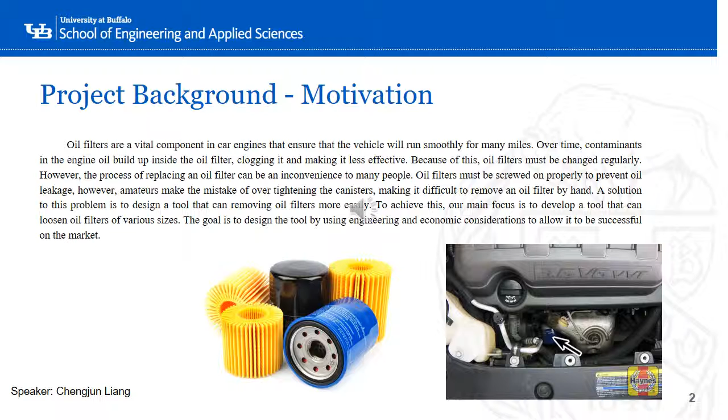In order to solve all these problems, our group decided to design a tool that could remove the oil filter easily and effectively. This tool will work on oil filters of various sizes in various angles.

In order to design our oil filter wrench, we must first create a framework to determine all the functions of our tool. These functions will ensure that our oil filter wrench operates as desired. First, the tool must be able to fit around the housing of a typical oil filter that is commonly used in modern cars. The wrench must be able to hold and grip the surface of the oil filter canisters, even if they are oily. In the process of gripping the oil filter, it would be beneficial if it did not cause significant damage to the housing, as this can cause oil to leak out.

To make the tool more versatile, the user must be able to apply torque at any angle relative to the gripped location. This will allow the user to approach the oil filter at any angle. Finally, the tool must be comfortable for the user to operate. To do this, it must be both ergonomically comfortable to hold in the hand while also being lightweight so it does not cause strain on the arm.

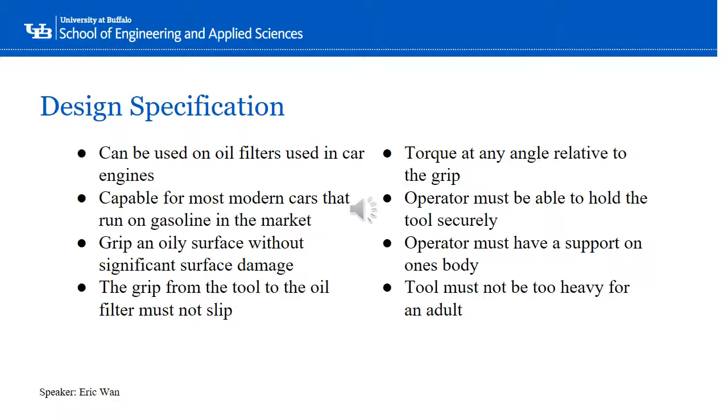Throughout the duration of the project, we had to create written reports that showed the progress that was being made on our project. The first step was to create a Gantt chart. The Gantt chart is a tabulated schedule that shows the due dates for each assignment and gives information on how much time we have to do each of them. Next, the project specification. This report provides a framework for the design of our wrench, the parameters under which it must follow, and the goals it must achieve.

The prototype concept details the physical design of our wrench and the method that will be used to test it and determine if it works. The prototype drawing is a CAD drawing of our prototype that informs the exact dimensions of our product. For the materials and components list, we decided that we will fabricate the handles and jaw from scratch while purchasing all the bolts and nuts since they are standard parts.

The design review is a recap of all the previous assignments. Finally, the economic and environmental report details the cost of mass producing our tool and the environmental impacts it will have from its fabrication, use, and disposal. The final report compiles and summarizes all of the previous reports that were handed in.

To inform us of our design choices, we gathered information from a variety of sources. First, we found 2 textbooks that were useful for learning about the physical properties of our tool. These texts were Shigley's Mechanical Engineering Design and Materials Science and Engineering, an Introduction. From these textbooks, we found information regarding yield strength and ultimate tensile strength. The American Society for Testing and Materials provides accurate data on these values for a variety of materials.

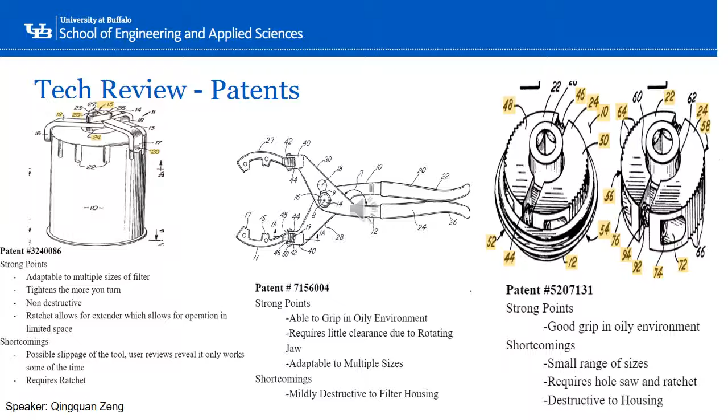The one at the right can also provide good gripping powers in oily surface. However, it's limited to a small range of sizes and it requires a ratchet to operate. Lastly, it can also damage the oil filter housing. We gather the advantages of these patents to insert them into our design, and we try to avoid these shortcomings.

We created 2 surveys on automotive forums on Reddit. One is about methods used to remove the oil filter and the satisfaction with the tool, and the other survey is about the difficulties throughout the process. 250 people take these surveys, and 200 of them are mechanics or automotive professionals.

We did a functional decomposition, and 2 sub-functions and 2 auxiliary functions were identified for the overall function of removing an oil filter. Different combinations from each form of each function can be evaluated to create the morphological designs. With so many possible combinations, we used engineering judgment while keeping customer needs in mind, like ergonomics and economics, to eliminate undesirable combinations.

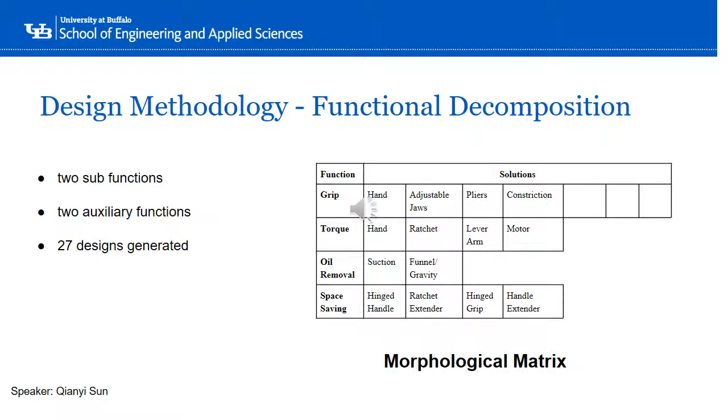The designs generated using the morphological matrix and brainstorming are filtered to find the overall best designs in concept selection. 27 designs were generated, and 10 best design concepts were then passed along to the objective selection method. To screen the choices, the best 10 designs were screened to 5 by going through a screening matrix, which quantitatively screens the design based on a number of characteristics relative to a reference design.

And the last 5 designs are selected by continuing on to be scored against the same characteristics but out of a maximum score, with each characteristic being weighted out of 100%. The concept selection process is shown in the slide, and the selected design is M7 hinged filter wrench. Then the chosen design can be modeled.

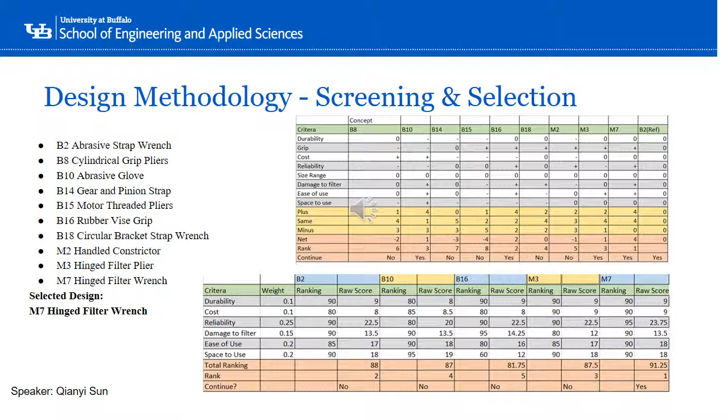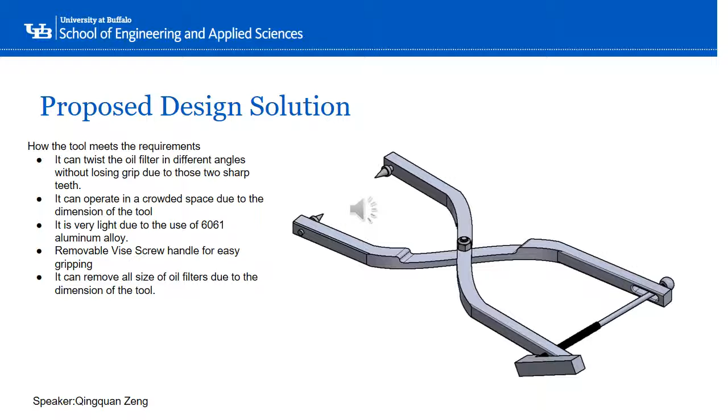Here's our design solution. The sharp teeth at the end of the handles can provide strong grip to our oil filter and can operate in different angles. The design dimensions of our design can help our tool to operate in crowded space and to clamp different sizes of oil filters. Besides that, the use of a 6061 aluminum alloy can help us reduce the weight of the tool. Finally, the removable vise screw handle can help provide gripping powers.

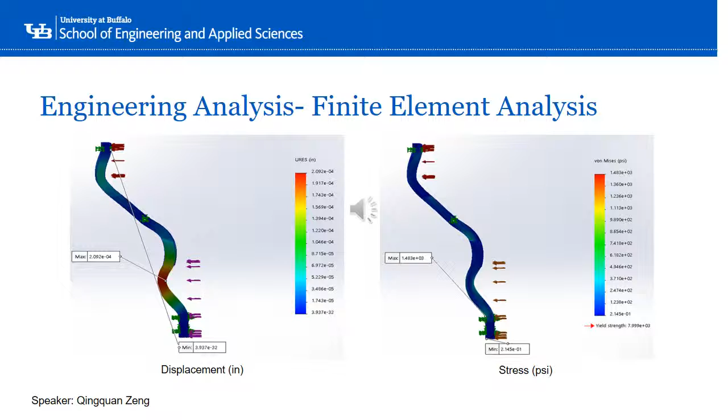At the end, we obtained a maximum stress of 1483 psi and a minimum stress of 0.2145 psi. For the displacement, we obtained a maximum of 2.092 × 10^-4 inches and a minimum of 3.937 × 10^-32 inches. Anyway, our factor of safety is always greater than 4. And one thing to notice is that the deformation scale of this FEA is 5,800. That's why it looks exaggerated.

A good analysis that can be performed on our tool is mechanical advantage analysis. This provides a relationship between the work, force, and/or the distance between the input and the output. Our input is the rotation of the vise screw handle, and the output is the movement of the spikes. Since the vise screw moves 1/20th of an inch in the axis of rotation for every rotation, and the handle that turns it rotates with a circumference of 28.26 inches, the power transmission is given in equation 2 and is shown to be 565.2.

Now, as the ratio of the lengths between the vise screw and the center of rotation of the tool, and the spikes and the center of rotation of the tool is 1.4, that also amplifies the power transmission. As shown in equation 3, this is approximately 800. That is, for every 1 newton of force or distance traveled at the handle, 800 newtons of force, or 800 times that distance traveled at the handle, occurs at the spikes. This allows for quite a bit of mechanical advantage and would allow for puncturing of any sorts of metal to be very easy.

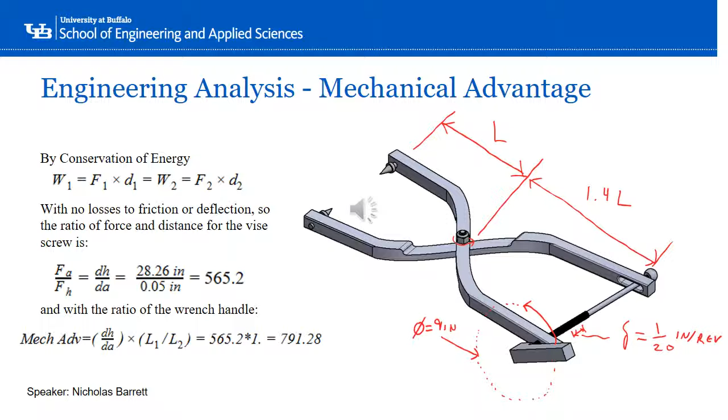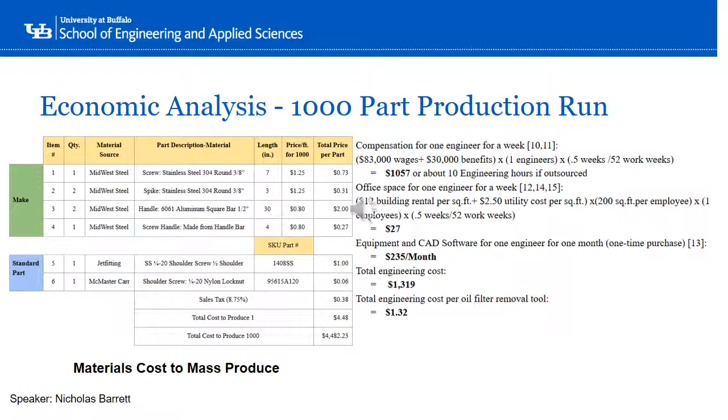Now, the engineering analysis for our tool would probably only take one engineer half of a week, and you could see our estimates for the cost of that on the right. The total cost for the engineering would amount to $1.32. Now, that, when combined with the total cost to produce one tool, only brings the total to about $6, which is very reasonable.

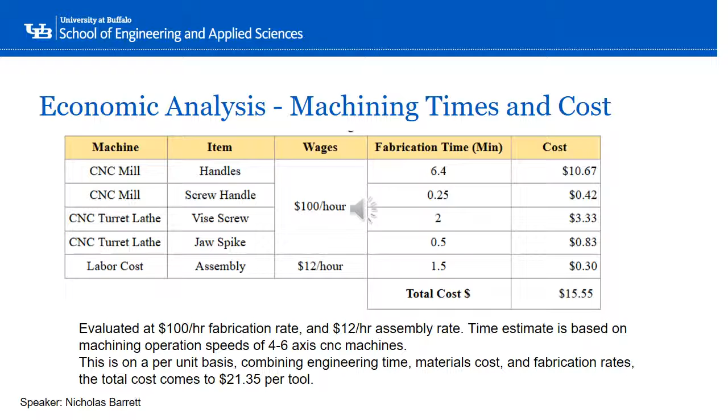Combining the cost to machine, the engineering cost, and the materials cost from the last slide, the total cost per tool comes down to $21.35, which puts us just under our recommended asking price of $25 per tool. Now, this is only for a very small production run of 1,000 parts, and this price could be greatly reduced if you increase the amount of parts produced. But for our analysis, this seems more than reasonable.

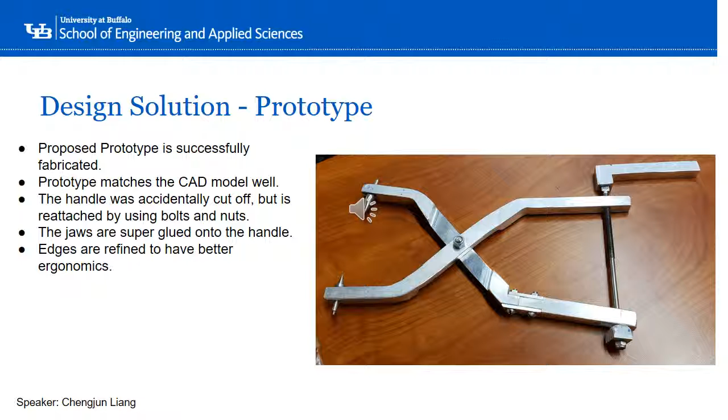Our oil filter removal tool obtained a successful result in the testing. The tool can puncture a filter housing to maintain grip in any condition without the effort of using a hammer or a screwdriver. The large shear area at the spike to the filter makes tearing and slipping very unlikely to happen. It can also torque at any relative angle as expected. The tool was able to overcome the over-tightening that was used in the experimental test. Even though little deflection occurred in the tool, the tool still maintains the 791 to 1 force advantage most of the time.

Based on the success of the prototype and the profitable manufacturability shown in the economic analysis, the production of this tool may be viable if there is a significant market demand.